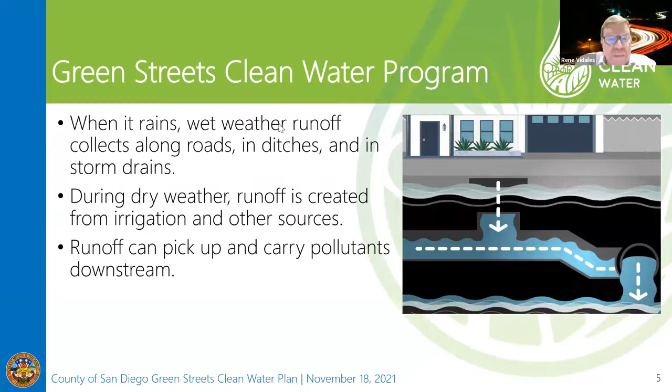So pollution impacts the uses of the water body, that's where all the storm drain gets discharged to. For example, fishing can be impacted by algae blooms and fish kills. Beaches can be closed and swimmers can get sick. So runoff, whether it's from wet weather or dry weather, affects water bodies.

Coupled with other county programs, the Green Streets Clean Water Program, which is what we're describing here, is one tool in the toolbox to further reduce pollution. Like you can see in the image here, we're trying to utilize available spaces in the public right of way to further provide treatment for runoff.

This effort is being driven by the need to implement strategies to further the water quality goals established in the current stormwater regulations. This planning effort will identify candidate Green Streets projects across 8 watersheds to retrofit existing developed areas. Not only will we identify projects with the most water quality benefits, but we will also be using the triple bottom line approach to maximize environmental, community, and financial benefits.

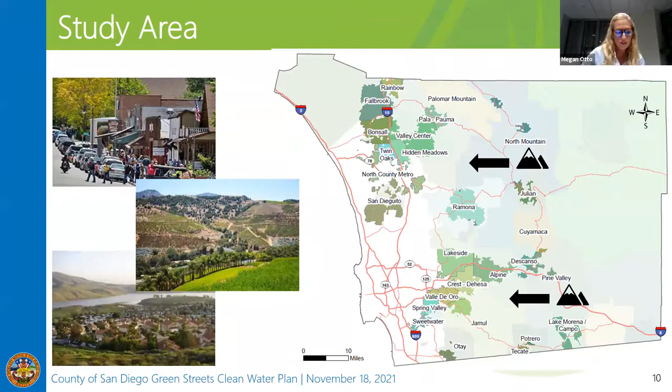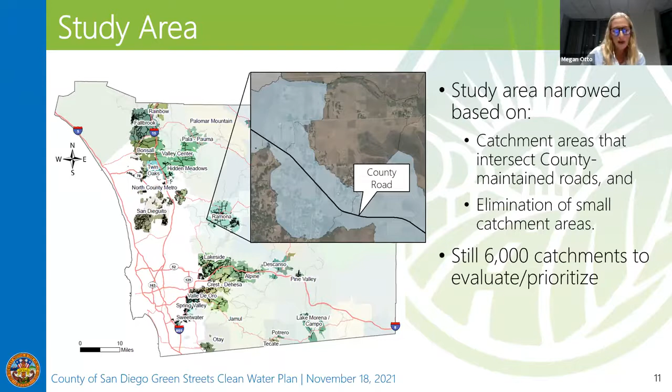We next narrowed the study area to specific catchments or drainage basins that intersect the county maintained roads, as this is where the Green Streets projects would be located. We also eliminated small catchment areas to focus on the more impactful opportunities. This left 6,000 catchments to evaluate and prioritize, and we'll get into that next stage in a bit. But before we get into the technical detail, first I want to talk about some of the bigger picture benefits of Green Streets.

These are broadly grouped into environmental, community, and economic benefits, and I'll just talk through a few of them. Looking at environmental benefits, as Rene mentioned, water quality is the primary driver, but you can also get things such as habitat enhancement, depending on if the Green Streets projects are vegetated and what types of vegetation is used. You can also have cooling provided by that vegetation and potentially enhancements to the groundwater supply if you have good soils and are above a groundwater aquifer.

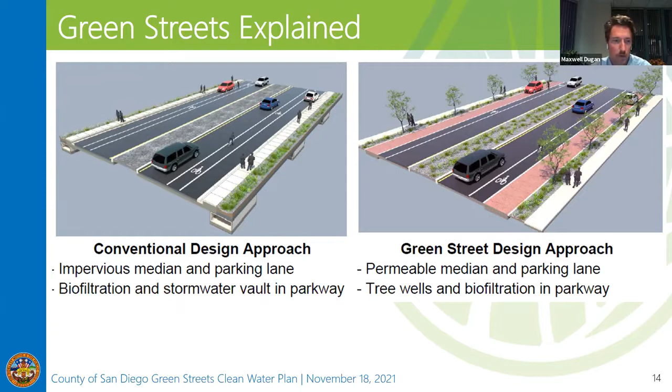And then we've used here a biofiltration or bioretention swale and potentially some tree wells to set that sidewalk back from the travelway and provide some physical separation and distance, which increases safety of mobility along this travelway. So this is just one example, and we're going to dive into some of these specific elements in the next few slides.

Like I mentioned, green streets treatment elements can both be visible above ground or they can be below ground and have less of a visual impact. Things like biofiltration basins, tree wells, dispersion areas, and permeable pavement are all pretty visible elements from above ground. When they're installed, you're going to see them and know that they're there. Some of the below ground elements are going to be less visible and you might not even know that they're there. Those include hydrodynamic separators and dry wells. But in many cases, a combination of these devices are used, and sometimes they're best used in a treatment train approach with multiple BMPs providing a combination of benefits.

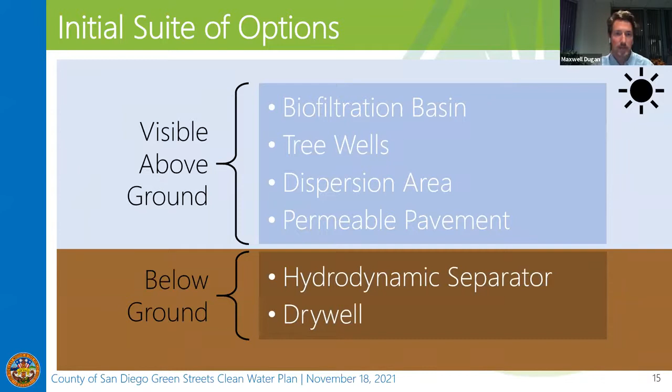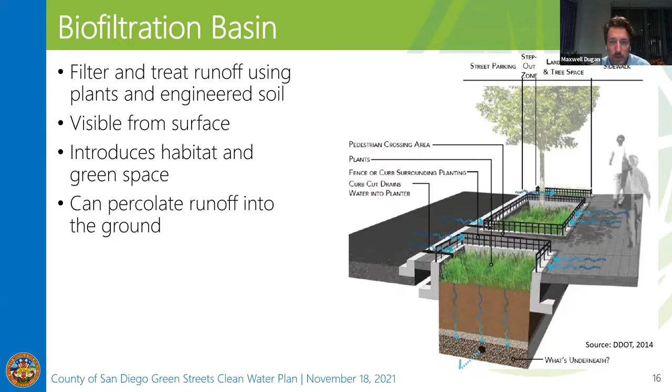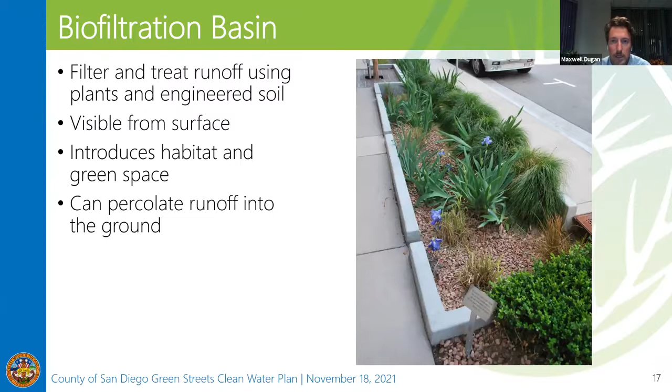But what do these look like individually? A biofiltration basin is one of the most common Green Streets BMPs, and it uses filtration to treat runoff using plants and engineered soil, specially designed soil that filters the runoff and helps remove pollutants. That water is then collected either in an under drain and discharged to the storm drain, or some of it's percolated into the subsurface and can be used to recharge local groundwater aquifers. Again, it takes runoff from adjacent impervious areas—that could be the road, the sidewalk, or surrounding properties—and treats it vertically, starting at the surface with the plants. The next slide shows an example of a small biofiltration basin installed between the sidewalk and parking lane on a street.

Tree wells are similar to biofiltration basins, but there are a few key differences. Biofiltration basins use smaller shrubs and grasses, so they have less of a visual impact. Tree wells use larger vegetation like trees, so they're much more visible elements within the right of way. The use of the trees provides a few benefits: one, it enhances the aesthetics of the street and potentially the neighborhood; it also provides shade, which can help offset urban heat island effects.

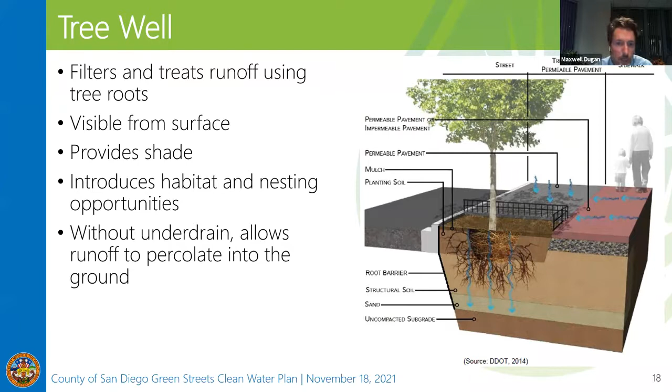The trees themselves can provide additional habitat for nesting birds and other habitat opportunities. But similar to biofiltration basins, these are using media filtration and root uptake to provide water quality benefit. The next slide shows an example of some recently installed tree wells within a neighborhood, again separating the street from the sidewalk.

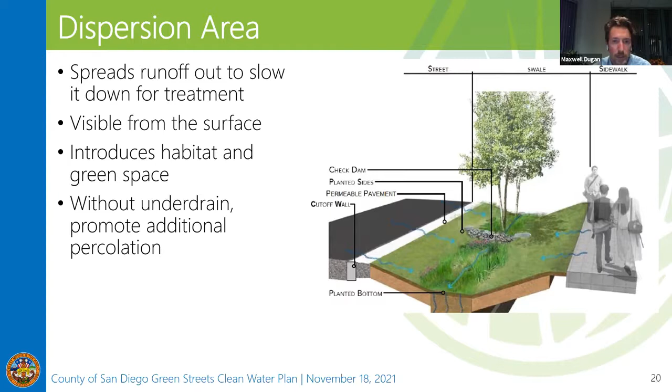Dispersion areas are a third kind of surface BMP. These are used to spread and slow runoff down before it reaches the receiving waters. This helps lower the peak flows and volumes of stormwater. These are used typically in place of channels or conveyances that are hard lined and paved and move water quickly through a system and can contribute to flooding issues. These are visible from the surface and they help increase habitat and green space within communities. And when they are used without under drains, they too can promote additional infiltration and percolation of water into the subsurface.

Here's an example of a couple dispersion areas along the street.

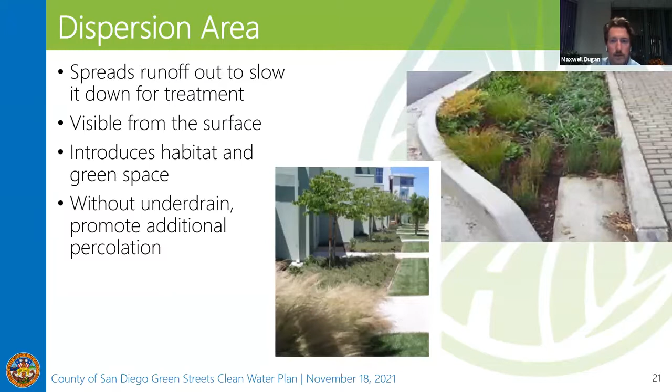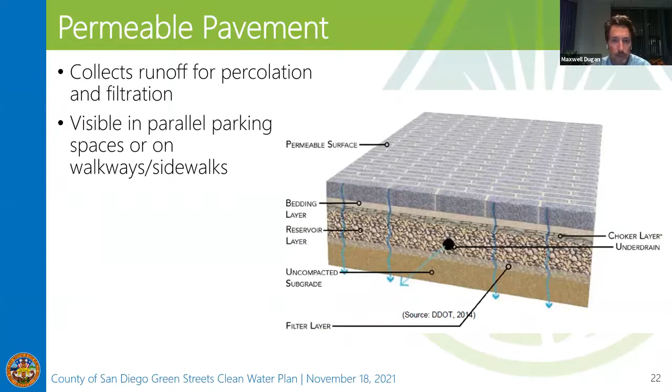Permeable pavement is our last surface BMP that we're going to talk about. Again, it collects runoff that runs on from adjacent areas, but also direct rainfall helps infiltrate that through the pavement surface and then into the subsurface. These are mostly used in parallel parking areas or along sidewalks and walkways, but can be a valuable tool in helping reduce the amount of impervious area and amount of runoff in our right-of-way. Here's a few examples. The one on the left shows permeable pavers within a parking area. And then the one on the right is actually a permeable asphalt pavement used in a parking lane.

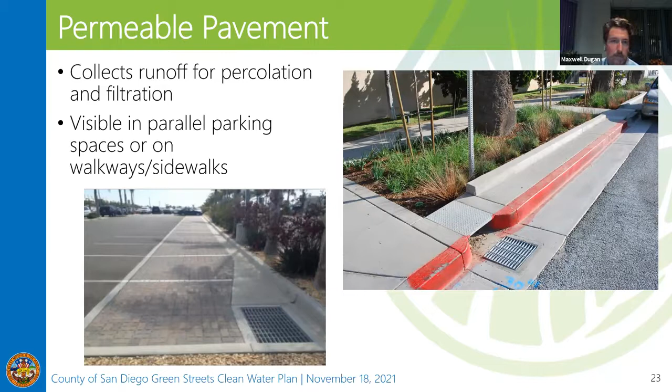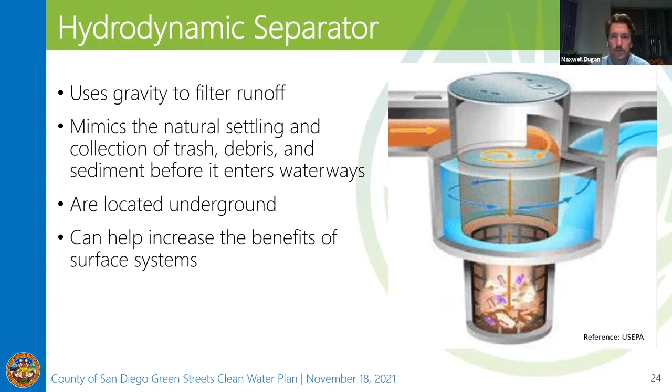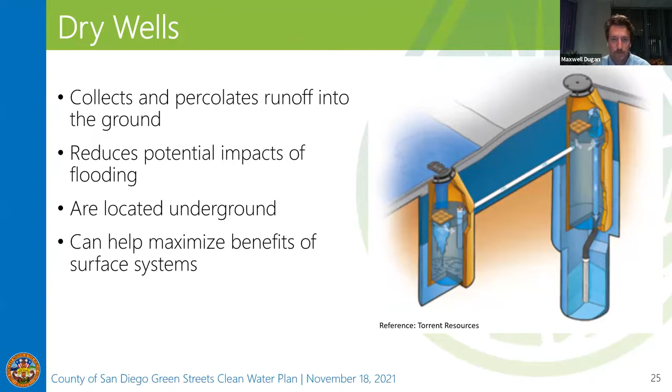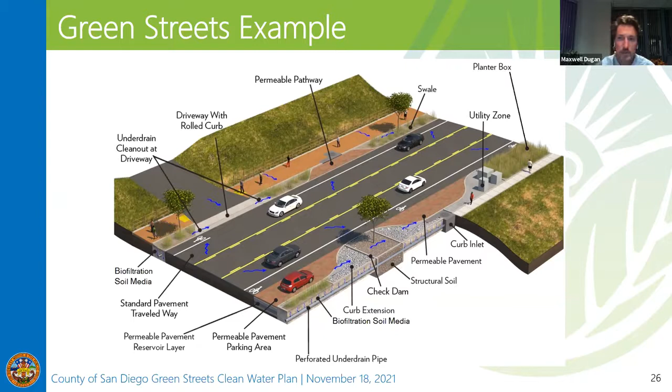So with that, I'm going to turn it over to Megan, and she's going to talk about project identification.

So we started with those 6,000 catchments I mentioned previously, and from there we wanted to really narrow down into where the highest benefit projects are located on the ground. So we did a 3-step process, starting with first looking at those 6,000 catchments to find which of them have the highest need. Secondly, we looked at what the best suited treatment systems are within those high priority catchments. And then lastly, we focused on assessing those projects themselves to see which of them provided the most benefits. At the end of the day, that's going to be the list of projects, and we'll get to that in a little bit, but first I'm going to step you through what each of these stages included.

So step 1, trying to identify the highest priority, highest need locations. Those 6,000 catchments were screened by looking at water quality need based on pollutant generation.

We combined that with community need, looking at which areas had very low tree cover or limited park access, and areas located in an identified underserved community. We also looked at potential for integration of Green Streets projects with already planned CIP projects, as well as integration with Caltrans priorities and projects. So we combined water quality and community need to narrow down the 6,000 catchments into the top 80.

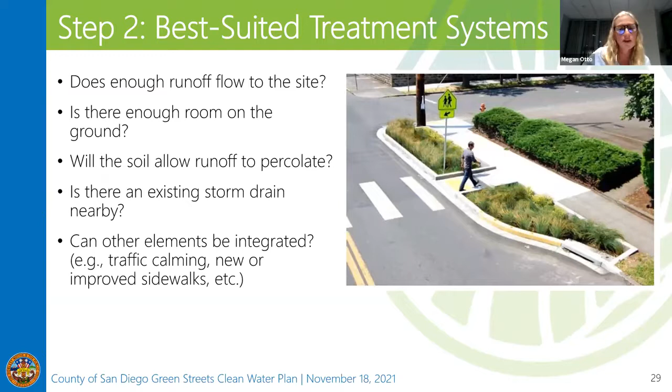Now I'm going to walk you through an example of what this looked like in one, or actually multiple, of our high priority catchments. Priority catchments, as I mentioned, are just a drainage basin, so all the runoff from one area drains to a single point.

It drains to the northwest towards Sweetwater Road. Looking at this in more detail, we found there was a private inlet that this area drained to, and it was actually already treated by a private system. Therefore, although it's a priority catchment, it's already treated, so there's no need to put a Green Streets project there.

Moving up to the 2.5 acre catchment, that one drains the same direction towards Sweetwater Road. However, it drains to a private inlet again, and there's no adjacent public inlet that we can treat the water using a Green Streets project within the right-of-way. So that area is also not able to be treated.

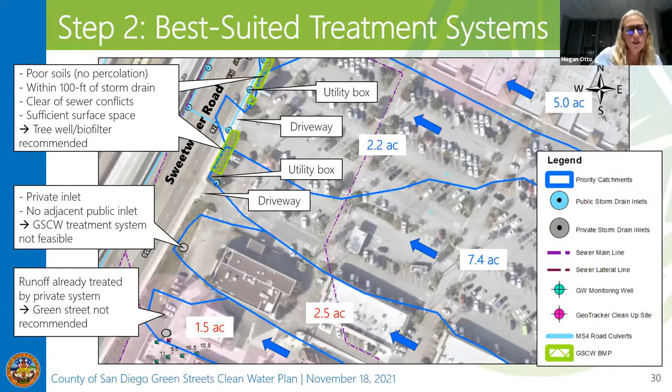Thanks, Megan. So the third step in the process was really to quantify the potential benefits of these various projects or potential projects. We wanted to look at this from a multi-benefit perspective, focusing primarily on three categories: the first being environmental benefits, the second social benefits, and the final category, cost effectiveness.

From the environmental benefit category, water quality is our motivating benefit here. We're trying to do these projects so we can improve water quality within the watersheds to help meet regulatory goals. But just by the nature of these BMPs, these treatment devices, they also have other environmental benefits, including augmentation of local water supplies by putting more stormwater into the ground, into groundwater aquifers that can be used for various supplies.

This helps reduce dependence on imported water. They can improve flood management, because by capturing a portion of that water and putting it into the ground, that takes it out of the storm drain and other channels, which can help reduce the amount of flooding that's seen. It also helps slow down the water, so instead of getting all that water at the same time in those channels, it slows it down and spreads that out over time a bit, bending that curve.

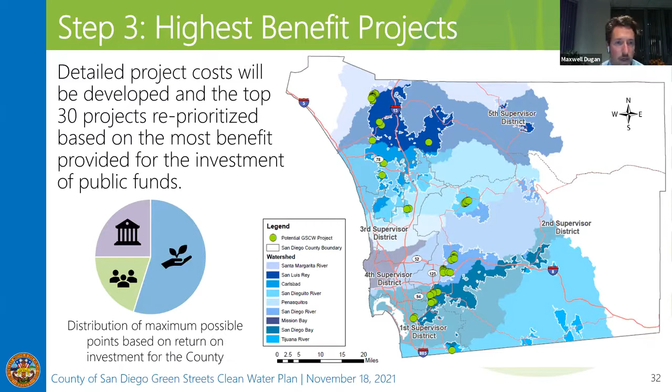One thing to note is that as a result of the water quality ranking and quantification process, we get maximum benefit by maximizing the amount of pollutant removed from the BMPs. Typically that means these are focused in land uses that have a higher pollutant concentration, so those are typically your commercial or industrial land uses. Many of the projects we've identified are going to be treating those areas.

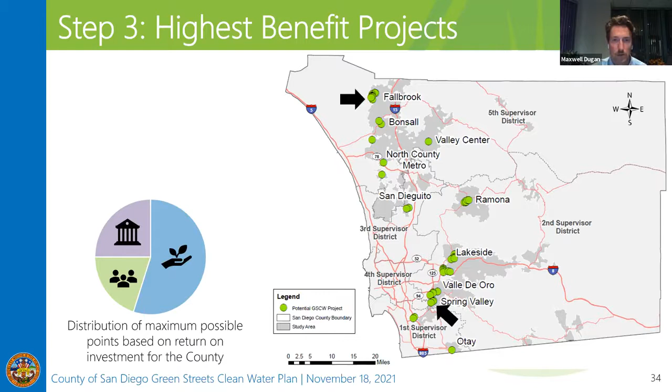We'll see a couple examples here. This figure identifies those same projects in relation to the various community planning areas, and the ones listed here are the planning groups that have potential projects identified in them, from Fallbrook up in the north down to Otay at the bottom. We've got two examples here, one up north and then one down towards Spring Valley.

A few statistics: this project has the potential to treat at least 11 acres of contributing impervious area. So far, we've identified up to 10,000 square feet of treatment BMPs, a combination of tree wells or biofiltration units, as well as a few hydrodynamic separator units where there's tighter constraints and less opportunity for a larger footprint BMP. Some other factors making this a higher priority project: it is identified as an underserved community, and Green Street strategies were identified within the WQIP for this watershed.

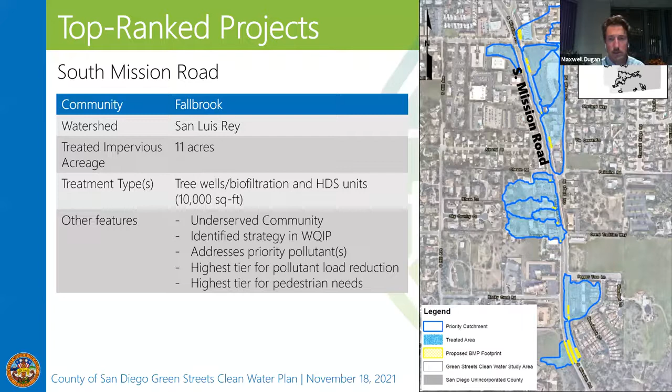And this was the highest ranked potential project by social benefit scores. Again, it would provide benefits in an underserved community. It helps address, could potentially help address, some identified traffic safety improvements or needs at intersections and segments of the road, and again helps address some of the priority pollutants within the watershed, and is in the highest tier for pollutant load reduction and for pedestrian improvement. So that's again why this project ranks very high within our initial ranking.

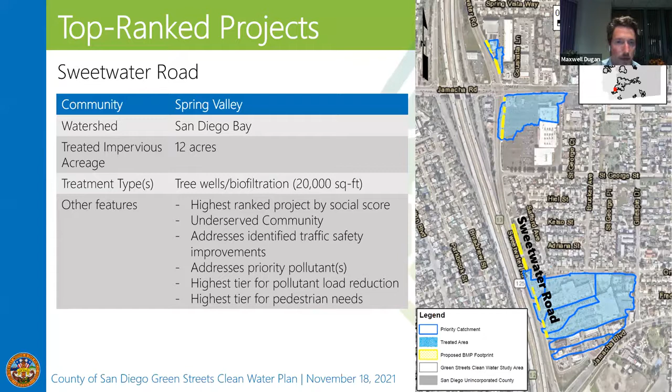As sort of a pilot demonstration, this project was not a part of this Green Streets Clean Water Plan, but it's a good illustration and example of what one of these projects actually looks like within the county. The Mapleview Green Streets project is a project that the county has in final design right now, and we're just going to walk through what that looks like. Along Mapleview Street, it's about 3/4 of a mile of the street. The project proposes to install almost 6,000 square feet of biofiltration basins and then 3,000 square feet of dispersion areas. It will also include over 2,500 linear feet of new sidewalk, and would treat runoff from a 38-acre impervious drainage area.

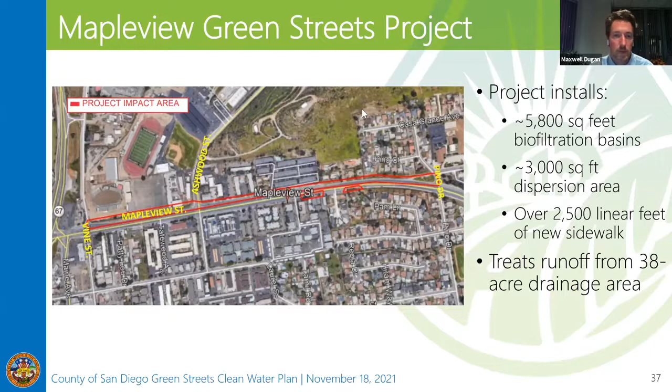So what is this? What could this project look like? We've got a few slides that show before and after. Before, we see some of the opportunity for Green Streets: we've got a very wide parking area, so there's underutilized space within the right-of-way. We've got a bike lane that's kind of floating out here, and then you can even see some of the pollutants, some of the sediment that are within the parking area. So you can imagine when it rains, all the sediment and anything that's in it is going to get picked up, carried into the storm drains, and dropped into the creeks with any pollutants that's with it.

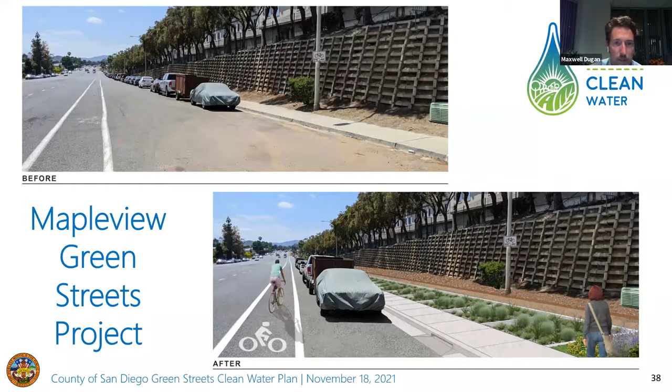So how can we add some improvement and have some benefit here? The picture on the bottom shows addition of biofiltration basins along the bottom of that crib wall. It pops out and makes better use of that wide parking area, and adds improved sidewalk along the length, and then some improvements to the bike lane as well. And these are just concept renderings—the final design might look a little bit different than this, but it gives us an idea of what these projects could look like.

And so with that, I'm going to hand it over to Renee, and he's going to let you know what we can expect out of the rest of the program.

Thank you, Max. So we have a lot of information to give you, but at the same time, we want to make sure that we give you an outline of what we're expecting with this program. So the Green Streets Clean Water Plan is expected to be completed in the spring of 2022. Some of the expectations are that we're going to give an overview of location and project selection and the process, so it's going to give you a menu also of benefit-driven prioritized projects. It's going to show along the way how this plan can be used in the future for prioritizing projects.